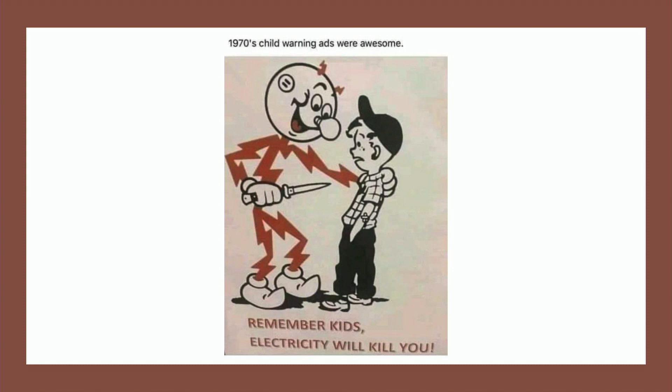Secondly, yeah, I've done that. Secondly, I want to tell you that electricity, you know this, is very dangerous. And this is an advert from a long time ago in America, I think. I put that in there because I wanted to have some visual bits. I thought electricity being invisible, it's a bit difficult to show people what it's like. Now, I've done that.

Electrician's terminology can be quite difficult to understand. So in your notes, there's a page at the back about electrician's terminology. It's very brief, it's just one page, but it gives some of the common words that we use. And before we go any further, I want to remind you what a ring main is. And are these in order? What is a ring main? Here we go. This is a ring main.

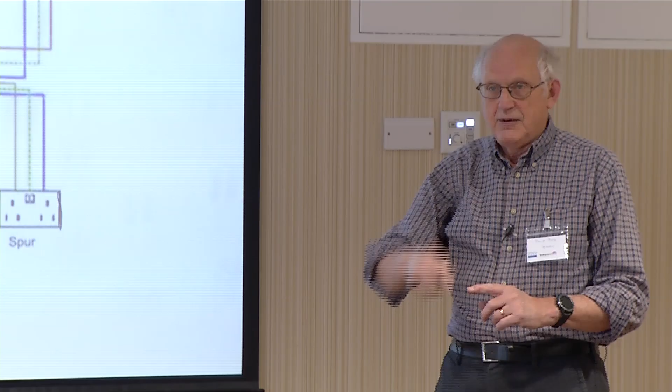It's diagrammatic. I know not all of you will be comfortable with this, but a ring main means we've got cables running to every socket from the distribution board, which is this one at the bottom here, and it goes round to every socket, and then back to the board. So it's a ring with sockets on it. Now, can any of you see any of those circuits that aren't on the ring? In other words, they don't have a cable coming from the left and the right. One of those, yeah, that one? And the other one, yeah.

There are two spurs. Now, this spur is taken off a socket. This spur is taken off a junction box, which might be under the floor, and you'll never find it if you don't know it's there. The disadvantage with rings is that the fuse that we put there to protect the circuit, and fuses always protect cables, the fuse is designed for that ring to be unbroken.

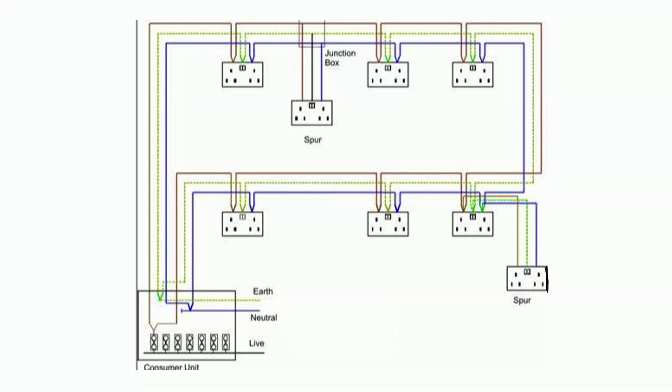Now, that spur is okay, but people often add sockets in their homes, don't they? So one problem is people adding another spur to that. That piece of cable then could get overloaded, and the cable could get red hot and start a fire before the fuse there goes. I'm not going to talk very much about rings, but you may be interested to know England is virtually the only country in the world that has them. Other countries thought, not a good idea.

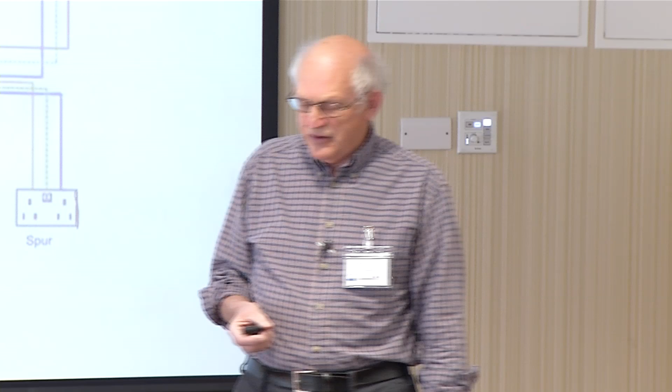Now, I'm going to move on to... well, wait a minute, before we do that, this is a very simple diagram of what you might find in a house. You can see at the top, fuse box, consumer unit, distribution board, DB. They're all words for the same thing. I'm either going to use fuse box or DB. DB is what us electricians use for short.

Now, there's a ring. All other circuits serving sockets apart from rings are called radials, and this is a radial. I always think of it like a tree. It's upside down, in fact. Cooker on its own circuit takes a lot of juice, so we want to keep it separate.

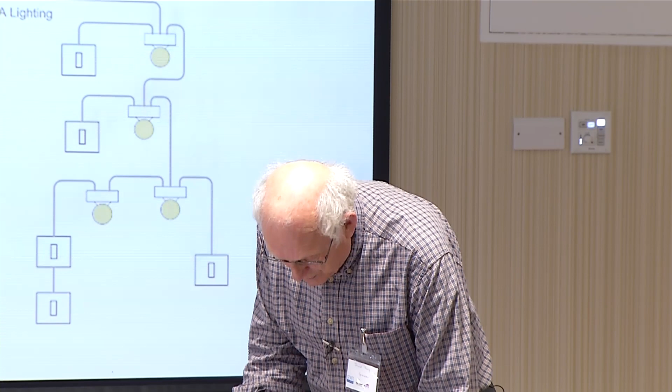Lighting circuit, one thing of interest here, you've got a light with a switch, light with a switch, light with a switch, light with two switches. That might be on a staircase where you've got a light and you want to be able to switch it on or off from the top or bottom of the stairs. Two-way switching. Now, if you want to know more about ring mains, it's in your notes.

Why do we have circuits? On this board here, we have one circuit for the ring, one for the radial, one for the cooker, one for the lighting. So we've got 4 circuits in this particular configuration. Why do we have circuits? Anybody have a guess at that?

Okay, I'm going to answer the question as if I'd been asked. We have circuits. We could, theoretically, if everything was fine, just have one fuse there to protect everything, right? And that fuse there would be to actually protect the electricity supplier's cables in the streets. In case something went wrong in your house, we'd want to protect the cable under the ground because it's expensive to dig it up. We could have one fuse.

The reason we divide an installation into a number of circuits is, one, for convenience, and two, nothing is perfect. Things go wrong. So if something goes wrong in a circuit, it at least has only gone wrong in that one circuit. Let's say your lights conk out, and you've got a trip switch, if you're lucky, got a modern board, trip switch switches out, you put it up and it goes down again. It's unhappy. It's tripping in order to stop cables overheating.

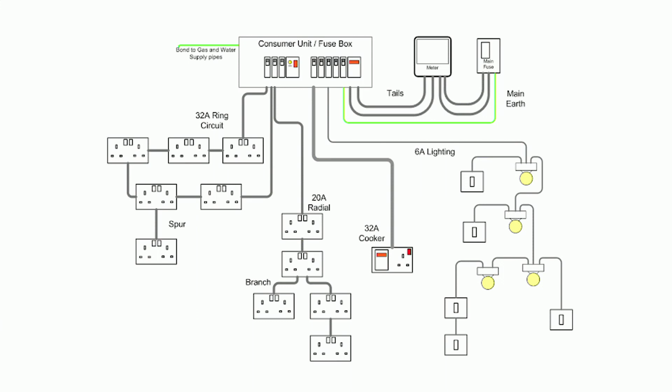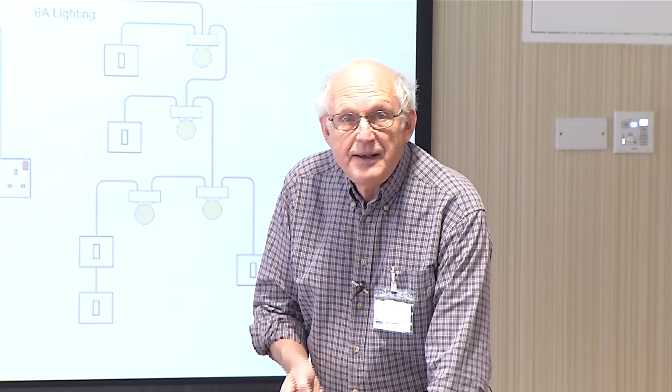At least only your lights have gone off, and you can say, well, we haven't got any lights until we get an electrician round, but let's use that standard lamp in the basement for lighting up the bathroom because there's no window in there. You know, that's convenient to be able to do that. Now, you'd also need bigger cables if you were going to put them all on one cable. You need a much bigger cable if you put them all on one cable. You would, that's true. Good point.

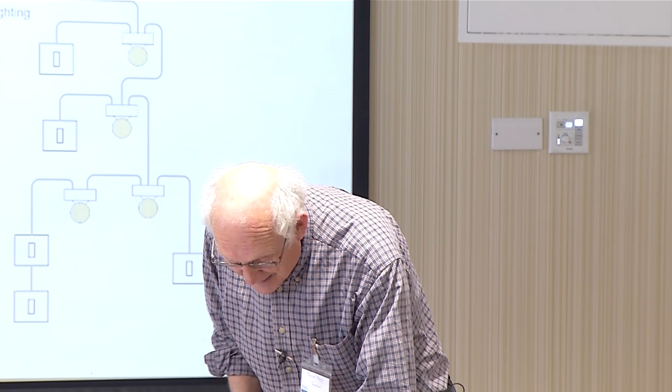Now, I'm going to move on. Have we got to this stage yet? Yes. Pitfalls following doing it yourself. Now, I'm not assuming that any of you would work on your own electrics, although there's nothing wrong with it. Certainly if you're changing a light fitting for another light fitting, or changing like for like, as we say, no regulations apply to that. Anybody can do that. You can do any electrics you like.

In fact, 2 people over the last 10 years, 2 men who were bringing up their house to a better standard, were rewiring the house. I've done a number of rewires, big job. Each time I negotiated with the man doing his rewire, and we did it together. Basically, he did nearly all the grunt work, and I was there to tell him what to do, and there at the end to check he'd done it to the standard that I would do it or better, and to sign it off, to make various tests and check it was all okay.

And I remember the second man, because I went in for an hour every couple of days to see how he's getting on. And I went in there and I said, you'll have to take all those cables out again. You haven't done what I told you. Those cables are too near the edge of the joist. He listened very carefully from then on. So the thing is, he was doing that job under my very careful instruction.

Most electricians wouldn't dream of doing something like this because it requires very good communication both ways. And many electricians, and it applies to some extent to other tradesmen as well, in this country, are not as good communicators as one would hope.

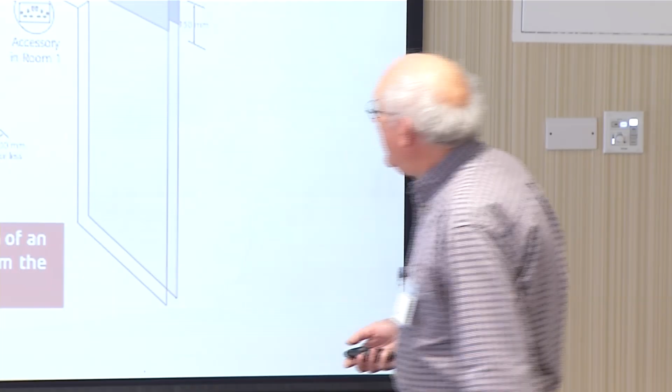Have you ever been in that situation where you're going to hang a picture on the wall and you just wonder before you drill into the wall whether there's any cables in the wall? Well, prior to, I actually looked up the date, prior to 1981, there has been a regulation about where you can put the cables, because remember, most of an electrician's work is invisible. It's cables under the floor, in the walls, up in the ceilings. Now, most of the cables are invisible, so you don't know where the cable is.

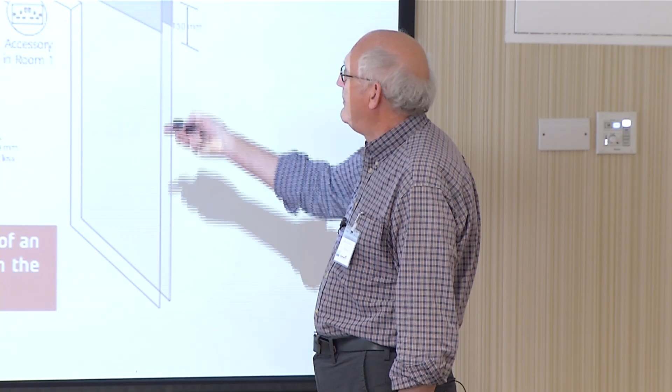So if there's a socket, say here, then the regulation says you must regard these up and down and left and right. You must regard those as what it says in this regulation, prescribed zones. In other words, don't drill there because there may be a cable there. Remember, nothing's perfect, so the cable may not go like that. It may go, the electrician was a bit, it sort of goes like that.

However, the general principle is steer clear of above and below and to the sides. And also, there are two other zones in the corner, whether internal or external, 150 mil. You can put a cable that way or this way.

Now, interesting fact, about 6 weeks ago, one of my subcontractors who works for another electrician told me that that's an okay place to run a cable. I said, it's not. He said, it is. And I showed him the picture in the book. And he went back to his boss, who'd been teaching him as a qualified electrician for years, and he had to tell his boss he'd got it wrong. None of us is perfect.

Another one I can show you. This is a regulation that's in our regulations, but it's more to do with the structure of a building than to do with electrical safety. If you're running cables under a floor, it's easy when you run the cable between joists. That's nice. But if you have to go across joists, there's usually not a gap to push a cable through. So you're either going to drill a hole like that in a joist and run your cable across the room that way, or you make a notch in the top of the joist there, and that looks like a pipe to me, but this is a cable.

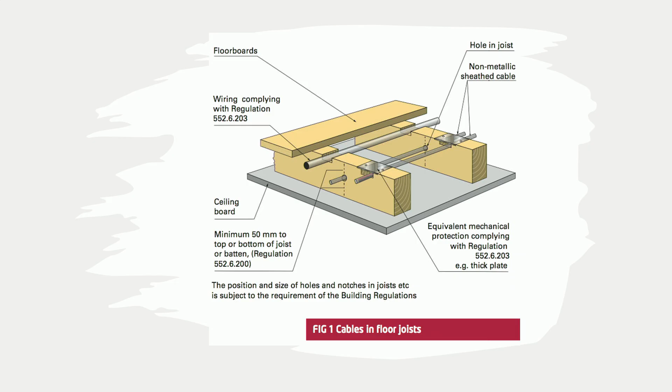And in fact, I think this isn't a very good diagram, because what I do, that cable, once it's come through that slot, I bring it down like that. So that there's minimum chance, because at the moment you could screw a screw into there, even though there's nothing underneath that cable, it could damage it. So that's something that people aren't aware of very much when they do their own electrics.

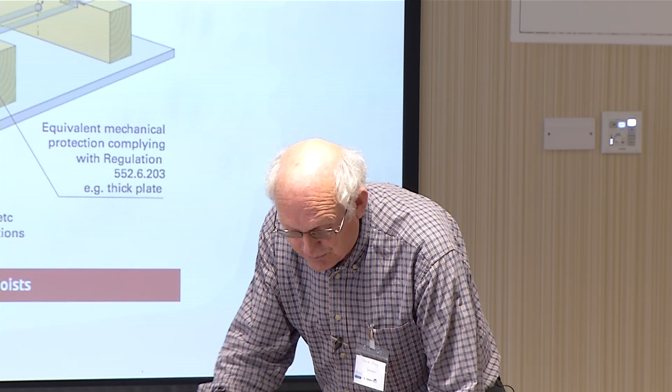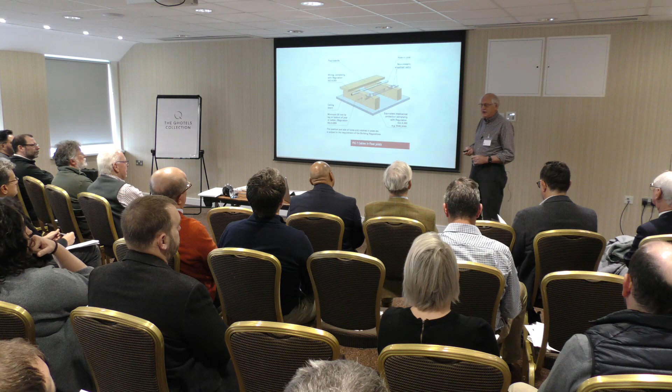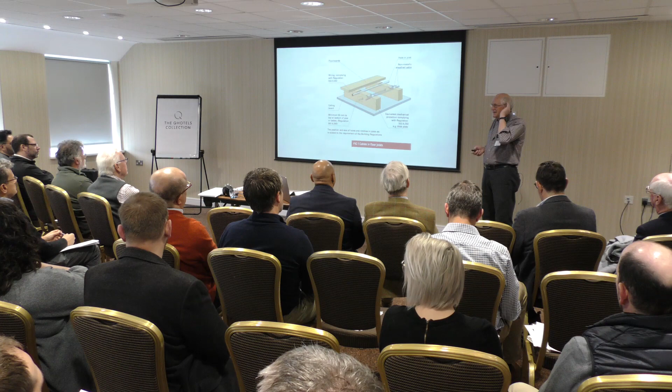Now, connecting the earth wire, does anybody know why we have an earth wire? Because if you travel to other countries, you often don't have an earth wire. They have live and a neutral, no earth wire. What's the earth wire do? Isn't it supposed to conduct away some of the voltage to the earth? So instead of getting a full electric shock, most of it is carried away. That's a very good answer. Yes, thank you for that. I'm going to move on to the next slide.

Now, in fact, if that happened inside there, if the live and earth were touching, if it was a trip switch, you wouldn't be able to push it up. You push it up and it comes down again. It won't stay. If it's an old fuse, like in this plug here, it would blow and it would break the circuit so it wouldn't go anymore. So that's one reason we put an earth in.

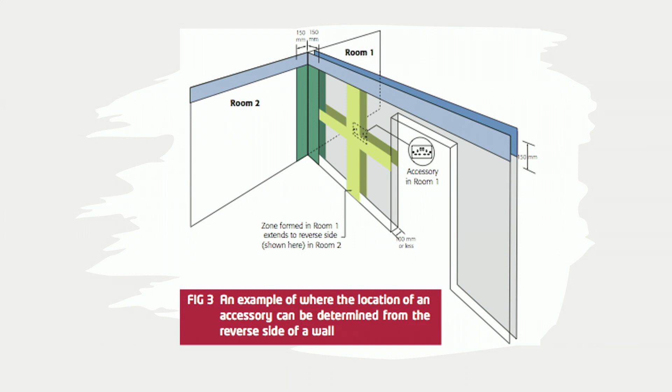So yes. Sorry, can I just ask you, on the previous slide you said that a cable wouldn't be okay running along the bottom, on the previous one where it was zoned. Zones, yeah. But why is that? Let's suppose you put a socket here, and you need to get a cable. The cable's coming under the floor, and you've done it diagonally across there. You would think that this might be an okay place to drill into the wall because you want to put a low-down shelf. Oh, okay, so you weren't talking about horizontally across the floor? Yes, horizontally. It's the cables from a socket or light switch or anything electrical.

Here we've got an example here. The cable, whoops. Does anybody know how to sort this one out? Yes, calling the electrician. I shall continue. There we go.

This is an example of an electrical accessory, and the cable to there should either run vertically down from the ceiling or up from the floor. Thank you, sir. Brilliant. Lovely when people know what they're doing. Or the cable could run sideways. What shouldn't happen, and we rarely find, but it does, is a cable running diagonally, because there's nothing to say that there's a cable running there.

So that's the regulation. The reality is that we go into houses, and particularly if they're 60, 70 years old wiring, we find all sorts of things. But this is what you should find. It's designed to keep us all safer. Another reason for an earth wire: imagine you've moved into a new house, and you don't like the white plastic switches, so you get some nice Georgian ones that match the other things in the house, and you change all the switches for these Georgian plates. And they're of course made out of metal.

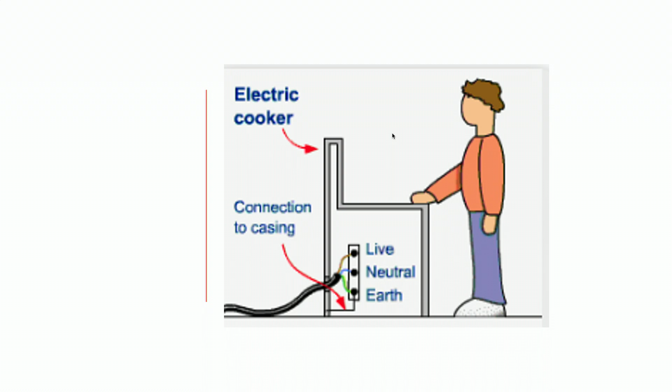And imagine, inside your light switch, if the live wire touches the metal of the switch, then that switch will be at 240 volts. If, however, the switch plate is earthed, as it should be, then it will cause a fuse to trip, and it will save your life. You imagine you're switching a switch on, bang.

Don't touch that. Sorry? Don't touch this. Don't, thank you. I always listen to good advice. Thank you very much.

Now, a couple more things about jobs people do for themselves. Changing a shower. Now, changing an electric shower, you might say, well, I've got the same model, the pipework will fit, I can wire up the electrics, that's all right. What you didn't think of was that your old shower was a 7.5 kilowatt, on a 6 mil cable, protected at the fuse box by, let's say, a 32 amp fuse.

And you've gone and bought a 10.5 kilowatt shower because it said on the box, gets nice and hot. Well, it said it another way, but that's what you wanted. You want a good hot shower. What you don't realise is that you're running that shower for 10 minutes and the cable is getting hot. Now, that's all right because the 32 amp fuse should protect that cable. But remember, we never rely on things because nothing's perfect.

If that 32 amp fuse chose to be 1 in 1,000 that didn't work, that cable's getting red hot and starting a fire. And the cause of that was you, I'm sorry to say, the person changing their shower for a higher power one without thinking about what they were doing and perhaps getting advice.

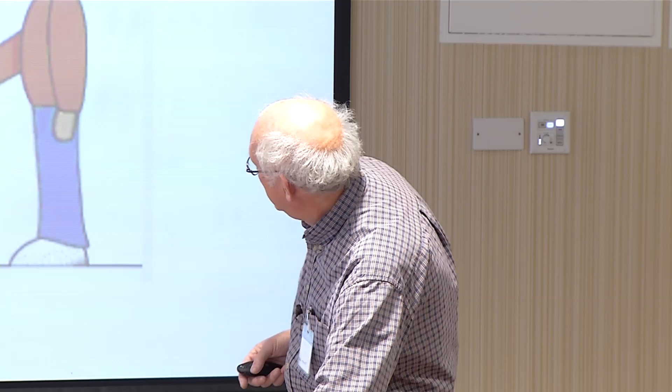Another thing we were talking about, we'll go back a few slides, we were talking about, doesn't work anymore. Don't understand why not.

We were talking about running cables under the floor. You imagine you've got this hefty cable for a shower run under the floor, it's notched through joists, and one of the joists where it's notched is under a floorboard, and you walk on it going up the stairs, and over years you keep squashing that cable. And that then becomes a weak point in that cable. So if anywhere along that cable is going to go, it's that place that got damaged because you allowed a cable to go through a place where it gets squashed over and over again, eventually damaged.

Okay, so let's go back to there. We'll jump now to something that happened about 2 months ago. I was in this woman's house in Totnes, and she had a problem with a particular circuit causing her RCD to trip, and I had to find out what was causing that, and there were about 6 sockets on that circuit, and she said, I think it's that one. I always take notice when people have a thought like that.

So I opened up this socket, and I said to her as I took it off the wall, there's some odd stuff on here, look at this. And it was like there was a sort of deposit on top of the metal contacts where you put the wires in. And I pulled it out further. Oh, there's a slug in here. And oh, the slug's still alive.

Now, what had happened is somebody had drilled a hole from this socket outside. And when we go through a wall in a building, we always go down from in to out to make sure water is less likely to come in. So they've run a cable out from that socket to have a spur on the outside for an outside socket. All very good. They didn't seal the hole.

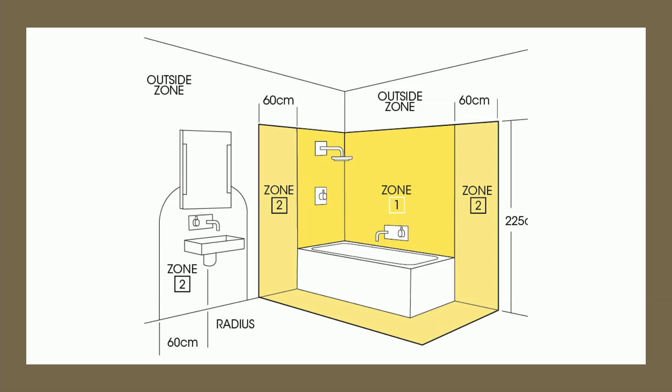Please. On the previous slide, when you've got a wet room rather than a bathroom or a shower room, so there's no shower cubicle, how do you go about measuring the zones for a wet room? I believe, I'd have to look it up, but I believe the whole of a wet room would be zone 2, if not zone 1. I'd have to look it up.

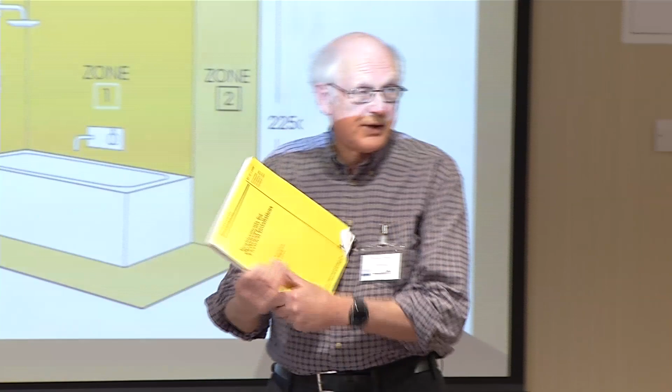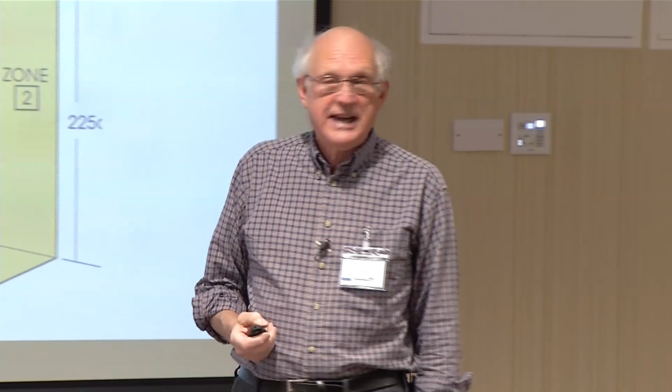And in fact, this is the book, it's referred to in the notes, this is the book that we electricians use, Requirements for Electrical Installations, or BS 7671 for short. You might like to take a minute or two to come up here afterwards and have a look at it. It's the least readable book I have ever come across. I never bother to look anything up in here. I belong to NAPIT, and I ring up the engineer, and he knows the book inside out, and I'll ask him anything. I would ask him that question about the wet room, and he'd tell me it's all zone 1, and then I'd know. I said, good, I guessed that.

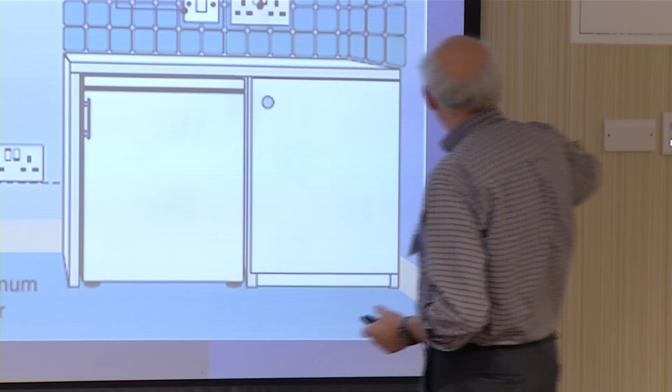Now, we were going on to, oh, that's right, disabled. So, because of our increasing awareness, only recently really, about disabled people struggling with all sorts of things, minimum height above the floor for sockets is 450 mil, and the maximum height of light switches, this tells me the age that this was done. That's the height of light switches in the old ways, thereabouts. We bring it down to about here, 1200 from the finished floor level for switches. And basically you can put switches and sockets anything between those two heights.

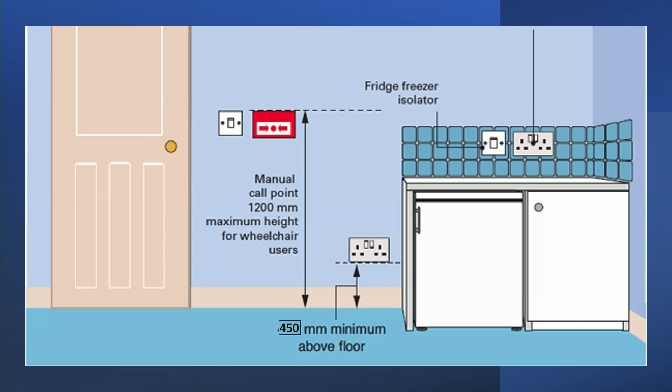Not only disabled people, I've got some very elderly clients who say, oh, I really like that new socket, I can reach it. Because when you get very old, getting down to the skirting board to plug something in is very hard. So it's an obvious thing. So these are the new heights, and we're talking in this chapter, as I call it, about older properties. So older properties won't have the new heights necessarily.

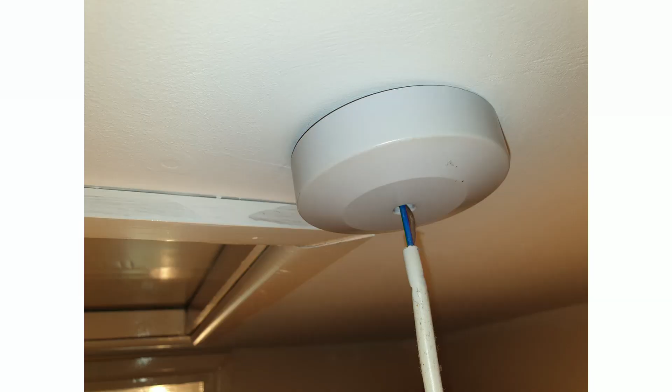Let's see what else we've got here. This is an example. All cables have to be covered with 2 layers of insulation. You may notice here, this is a pendant. Don't have any in this room because it's all modern lights, but you know a pendant's got a rose on the ceiling, a cord, a lamp holder, and a lampshade maybe. And I still go to houses that are looking like this.

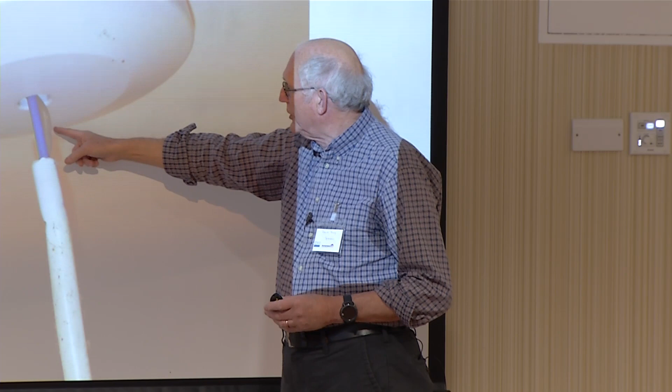And here is an example. This cable, the flex, has a yellow and green in it as well, but it's got a brown and a blue in it for live and neutral. And that is insulated. Each of those copper conductors is insulated, and that's outer insulation. So there's 2 layers of insulation.

There should always be 2 layers of insulation between the live parts and you. And this is an example that on an EICR, it wouldn't fail, it wouldn't be unsatisfactory, but it would be a code 3, could be improved. It looks unsightly as well.

It's actually quite a simple job to unscrew that, to pull that cable up a bit into the ceiling so you don't see those. But it's an example of something that is not well done. So I would think whoever did this either didn't know, didn't care, or was in a rush and they didn't do it properly. Older properties, and most properties in this country are old ones.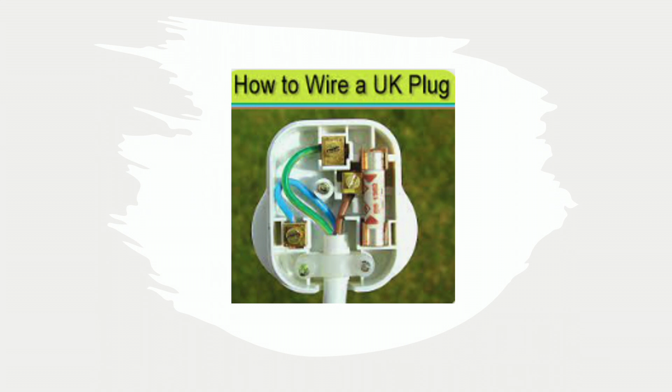Now, going back to talking about plugs, that is a well-wired plug. And you can see the insulation, the primary insulation, goes right up to the terminal in each case. Can't see any copper there. The next slide, what is the next slide? Oh! Can anybody see why this is not wired so well?

Something there, yes. Piece of wire wrapped around the terminals, possibly, yes. Anything else? No earth. No fuse. No earth, no fuse. Some of that secondary insulation is showing there. The cord grip there isn't gripped on that bit, there's a lot of things wrong with it. I thought I'd show you that. I just came across it on the internet.

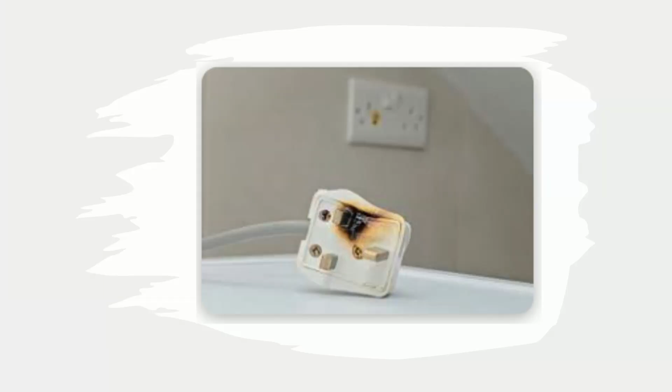This is something you may have seen before, which is a plug that is obviously unhappy. Now, it's unhappy, and it's also left a mark, because it was plugged in there. So I can only guess, because I just got this from the internet, but that burning mark is probably due to the fact that years ago, somebody who put this plug on didn't do one of the terminals up tight enough. And in fact, that terminal is the neutral. No, it's the live terminal.

Because they didn't do the screw up tight enough, because it needs a screwdriver and a bit of action with your wrist, the thin copper fibres of the flex inside that connection weren't properly making contact with the copper or brass terminal block. So there was a gap, and that means sparking. So that was probably fizzing for years.

And sparking makes heat and light and eventually is going to burn something out. It's not what you want, but probably due to carelessness. It could be due, let's say 1 in 100,000 times, to a badly manufactured plug. And the quality of all electrical goods has dropped in the last 20 years just because everybody in the world says make it cheap. Back to a distribution board.

I want to tell you something about the distribution board so you have more familiarity with it. I have had this several times where I'm rung up by an old lady and she's got a distribution board. She may not even know about this, but she says her sockets have stopped working. And I said, have you been to the distribution board and seen if one of your trip switches has gone? And she says, my husband used to do all that. Now that is sad because it's why girls should learn just as much as boys about doing stuff.

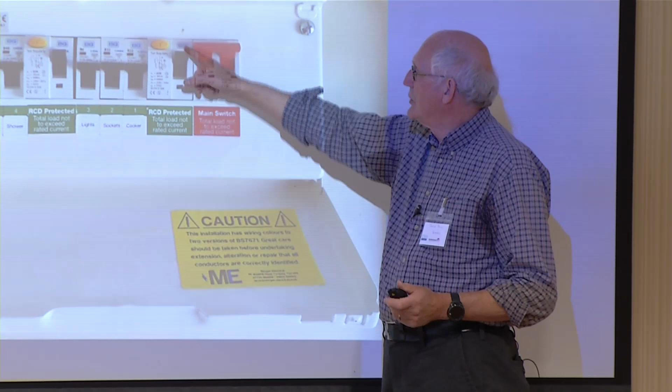So the theory is that if something went wrong, and we call it an earth fault, in one of your circuits, and this RCD looks after those 3 circuits, and there was more than 30 milliamps going to earth from live, this would trip. And if I tried to switch it back on again, it would trip off. And they've probably saved millions of lives, these RCDs. Whether they have or not, I don't know. I've tried to look up statistics. I've never been able to find any statistics that say RCDs work.

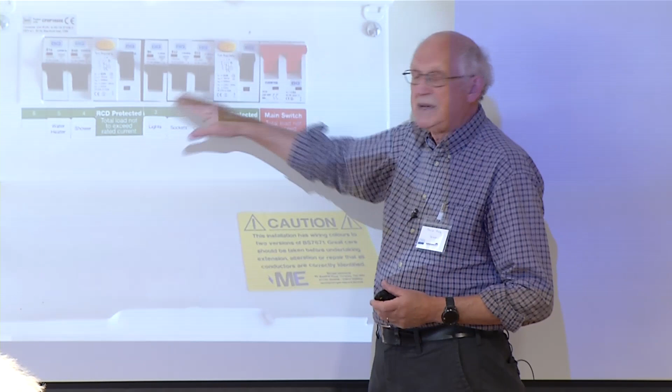Why the 2? This is called a dual RCD board. Main switch, 2 RCDs. And the MCBs, miniature circuit breakers, are divided into 2 groups, the left and the right. And it's because if this RCD trips, let's say this circuit has got a problem on it, this trips and can't be reset, at least you've only lost those. You've still got these. So that's why you've got 2 RCDs.

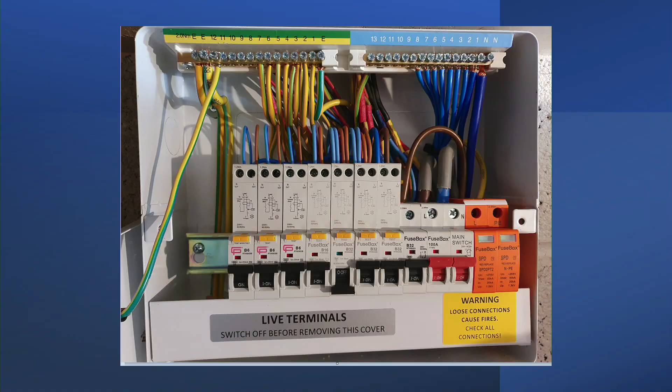However, I don't fit these boards. When I'm asked to fit a board, I only quote for a board... have I got a picture of one here? I probably have. Can you see each of these has got a push button? I'm going to go back for a second. On this RCD, each of them has a test button as well as a trip. The test button is there because once every 3 months or once every 6 months, you should go and test this by pressing that, and this should click down.

Now, they call it a test. It's not really a test. What it really is, is that if that sat there for 5 years, never tripping, and then there was an earth fault and it needed to trip, you know how mechanical things are. They seize up a bit. It might not trip. And I've actually come across this personally.

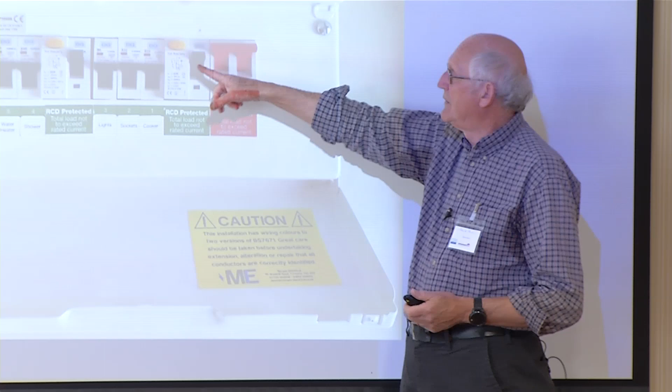In a new build place, there were 2 of these boards, each with 2 RCDs in. And when I first tested them, none of the RCDs were okay. They failed the test. And when I'd done this once, they worked. So what had happened is they'd sat in the same position for so long, maybe there's a deposit on the metal or something, they didn't trip. So it's very important to do this test, this keeping things moving, once every 3 months or 6 months. There should be a label on there saying it.

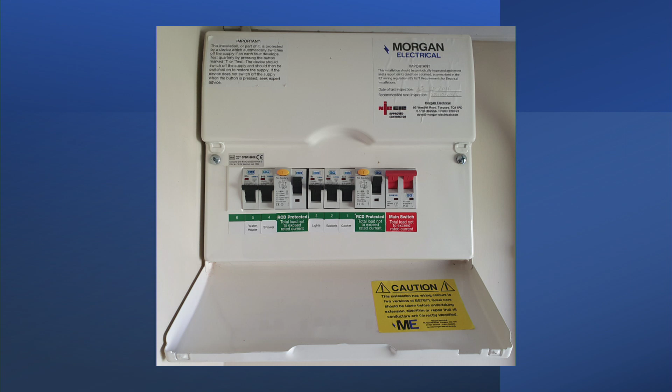There we are, important. That's what that label says. And all over the country, perhaps probably all over the world, people don't do this: one, because they don't know, two, because they don't remember, and three, because they don't care. I really don't know. However, the thing will not work if it hasn't tripped for a long time. It will stay on, conducting electricity when it should trip out to save you.

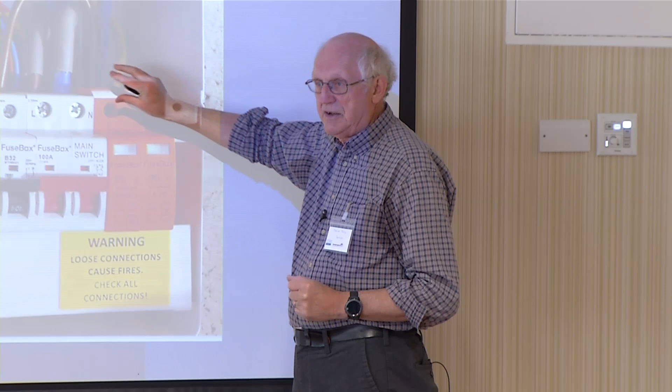The theory is that if there was a fault inside the distribution board, inside here, that caused a fire, by having a metal box, you are slowing or reducing the risk of that problem of fire. I mean, there's not much to burn in there, but supposing there are holes in the top where cables come in, supposing somebody didn't fill them, sawdust got in there, little insects got in there, and there's a lot of stuff that can catch fire. So a lot of assumptions. Having a metal box would contain that heat and slow down or reduce the risk of it catching other things in the house.

We'd be recommending replacing it with a metal box? That's an interesting question, because some electricians would say yes, should be replaced. In fact, the regulations say it only needs to be replaced if it's under a wooden staircase that is also an exit in the case of a fire. Now that's a very obvious place. Some old consumer units are under the stairs. We think nowadays stupid, but if it's plastic, regulation says it should be replaced by metal. Otherwise, if I was doing a report on it, I would say it's unsatisfactory because of the risk.

And another place is if the distribution board or fuse box is in a place that is a fire exit, like it could be in a hall by the front door, and that's the one place that people would escape. And so it should be metal to help protect things.

How much of being metal is to protect the inside from fire if the fire is on the outside? Because of course, if a fire burnt through a plastic box... In your booklets there's a picture of my sister's house that caught fire. I might show you a slide of that. And her plastic box is all horribly melted and blackened inside. Not caused by a fault in the board, but you've got a fire.

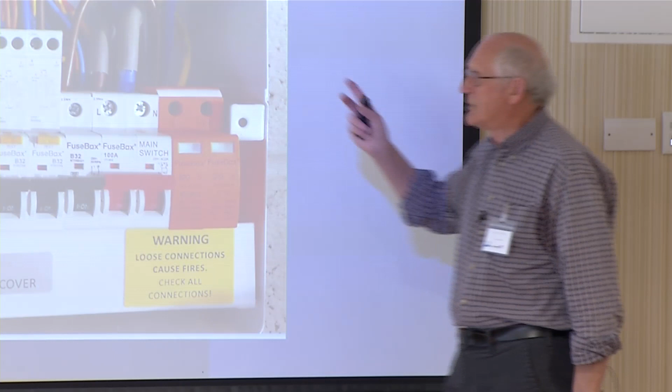If this is a plastic box and a fire heats everything up here, you've got problems with wires touching each other, like live and earth and live and neutral touching, and possibly causing sparking and another fire, and horrendous problems. We don't need it. So a metal box is a good idea. Why they didn't come in years ago, I don't know, because there are some fuse boxes from 30 or 40 years ago that are metal. I know why we produce them in plastic. It's cheaper.

Any other questions? Yes, sir. Just a quick one. If you've got your consumer unit underneath the stairs, which is the means of escape, should you have a smoke detector in there under the stairs as well? It would certainly be something you could argue, under stairs or a means of escape. Choosing where you put a smoke detector is quite a good thing. You have to think in terms of, one, where air flows, and two, what areas you need to detect.

And an attic space is another one similar to that. If you never use the attic, is there any point in putting a smoke detector there? If you use it occasionally for storing stuff, well, maybe it should have a smoke detector. Depends on whoever's making that decision, I think.

See, I normally tell clients this should be a non-combustible box. Yeah. And I tell them, is it over 450 millimetres high? The same regulation as the switch should apply, however, not all electricians would agree. So I don't know. And they shouldn't be in a bathroom as well? Downstairs WC? Unless it's in a cupboard, I think it shouldn't be in a bathroom. I think in a WC, it may be okay. I would actually get advice if somebody was asking me about this.

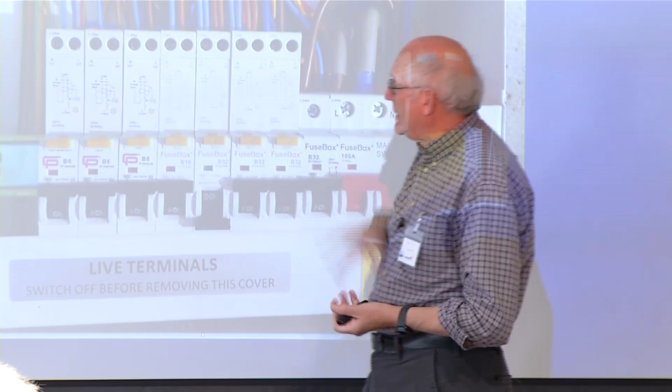Because the thing is, when you do an electrical installation, thinking about one of these boards, if we just put a new circuit in here for the garage, we're obliged, because we've touched this board, to check each of these circuits. But the check is very cursory. Basically, we go to the end of the circuit, check if that's all right, and if that's all right, we say fine. An EICR will check virtually everything on that circuit, check every socket and every light. So there's a big difference in how comprehensive it is. So yes, you should get an EICR recommended.

Sir? Just with regards to the changeover of the regs from an old Wylex to a plastic, back to a metal. So if, for example, you had the replacement of the old Wylex to a plastic about 5 years ago, then there'd be a fixed wire test, and you've got that scenario, it's under the stairs. Wouldn't that come under Cat 3 with regards to refurbishment, or is it under health and safety? You're saying that it needs to be replaced, and it would be like electricians just rubbing their hands. Is that necessary?

I agree, and you ask 10 electricians, you get 10 different answers. To be honest, the regulations that we have apply to now. However, we're often looking at a property that may be 50 years old, and we only need to make decisions about what is unsafe. What is actually unsafe? The fact that you have a plastic board from the past, or one with fuses in it, doesn't make it unsafe because it's still doing its job. Okay, it may have no RCD protection. I might recommend RCD protection is a better thing to have, but it is not considered unsafe according to the regulations. Did that answer your question?

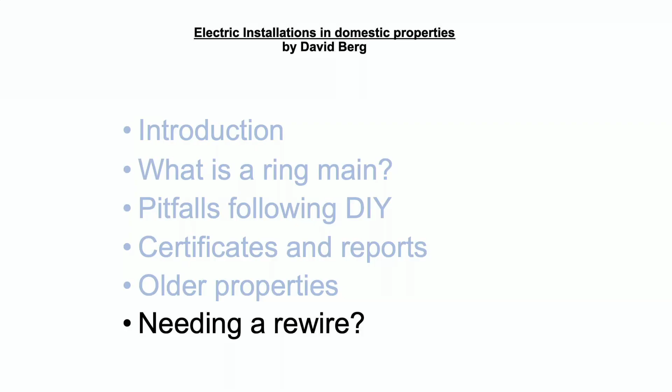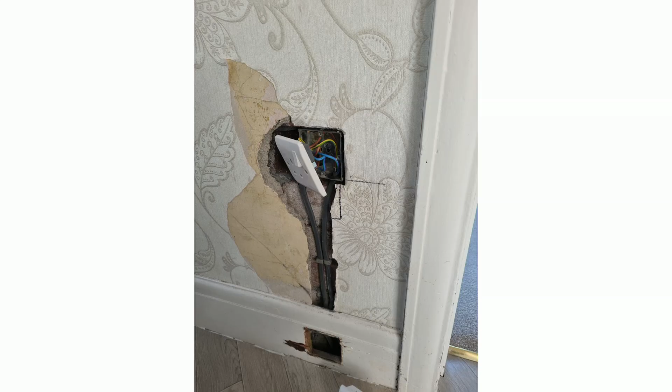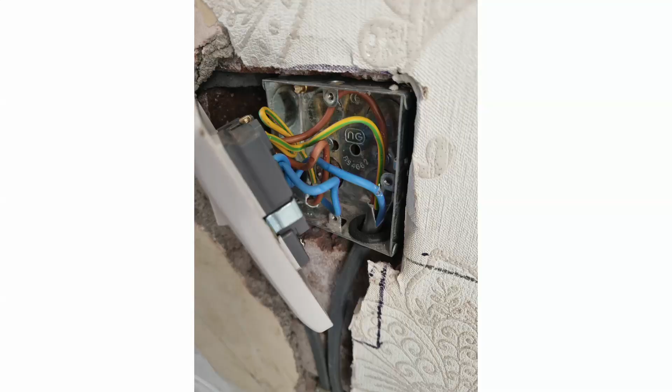This is a rewire that we did less than 2 months ago. We'd just done it, and there was a problem with one of the circuits, one of the socket circuits. And I tracked it down to this socket. The problem is inside this socket, and we need to home in to see what that problem is. So we home in a bit. Can you begin to see the problem? Now can you see the problem?

Right, so carelessness. It wasn't me who did this socket, fortunately, but it could have been. If you look at that point there, the blue plastic inner insulation on the neutral wire has been scraped, and it's bare. There it's not a problem, but when you push the front of that socket in, that wire can touch the metal box. And if you remember, the metal box should be earthed. So the neutral and earth are touching, and the RCD trips. So the RCD on this circuit could not be reset till we found this problem.

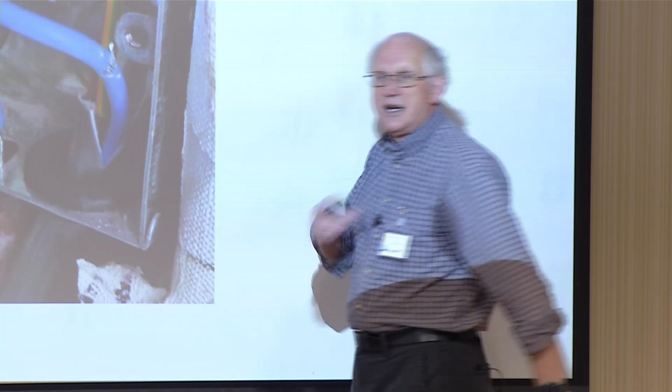As soon as I pulled the socket away from the wall, the RCD stopped tripping. So I said, it's got to be inside here. And so I started looking very carefully inside, because that is almost not visible. As I may have said sometime earlier,

electricians attract particularly people who are slightly autistic, because some autistic people are very good at the detail. They're not so good at communicating. And with this sort of thing, you see something tiny, you have to find that, otherwise none of the ground floor sockets work. It's a serious problem. It might take hours to find that particular socket with a problem like this.

You know, ultimately, if we can't find the problem, we have to say, well, scrap that circuit, we're going to run new cable for all the sockets again. You know, that's not what we want to do.

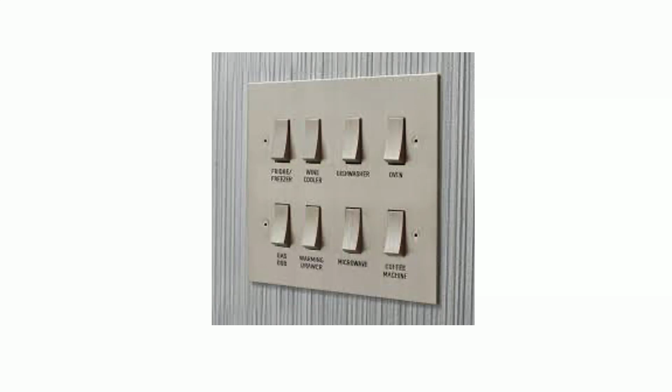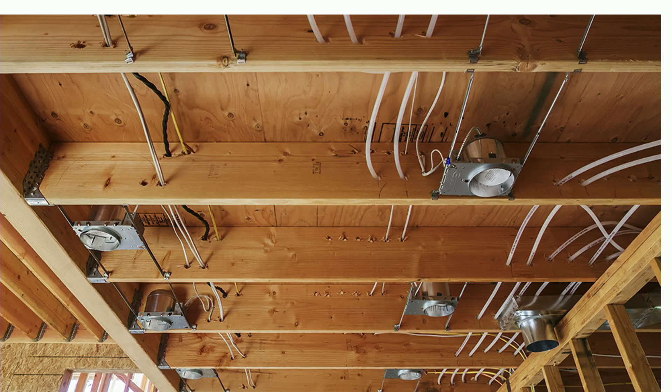What else have we got? This is actually not England, because this is not following English regulations. It must be America. But it's an example. It's a ceiling you're looking at there. And these are light fittings. And the cables are running through holes drilled in.

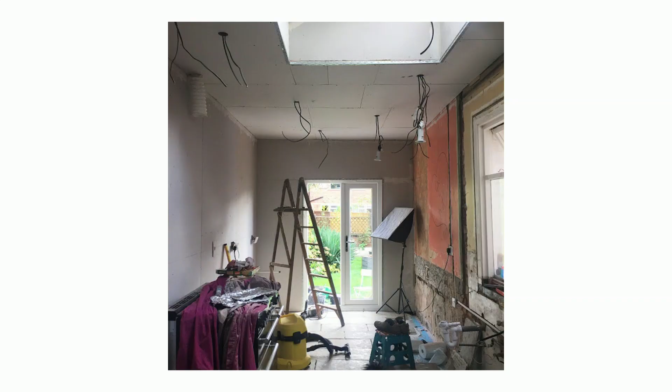Now, why I wanted to show you that is because when you put the ceiling up, you might have, this is now the UK, this is somebody's run cables in the ceiling, and you can see cables drop through for the lights. And you'll notice quite a lot of them have got two cables, because it's the switch live, coming to switch that light on, and then going on to the next one. So that's why you have a lot of complex wiring behind there.

And then particularly, I wanted to show you this. How do I make this go? It's a video. How do I make a video go? First time I've ever used PowerPoint. That's it. It's only brief.

Right. So, changing light fittings. Brilliant idea. Brilliant idea. But watch what happens.

I'll have a go at that. Oh, yeah. Great idea. There we go. Nice and firm. Yeah. Oh, doesn't seem to work, really. Oh, dear.

Well, I thought it was funny anyway.

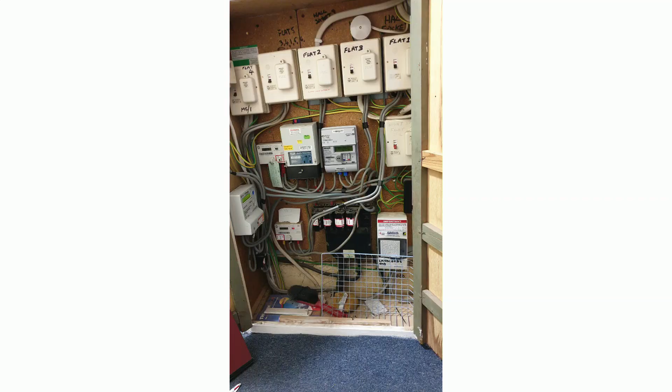This is a block of flats. You can see here, flat 1, 2, 3, and so on. This is your main incomer from whatever the electricity supplier is. And there's 3 phases there, 3 fuses. Those fuses are not owned by the person who owns these flats. They're not owned by the building owner. This and the meters belong to the electricity supplier. So that's all there, and you don't touch them. These fuses are to protect their cables under the ground.

If one of these goes, that's bad news, because you usually have to call them out, and they say, why has this gone? I've broken one of those before. Fortunately, I managed to get a spare, because otherwise the electricity company comes out saying, what have you done here, mate? So these virtually never go.

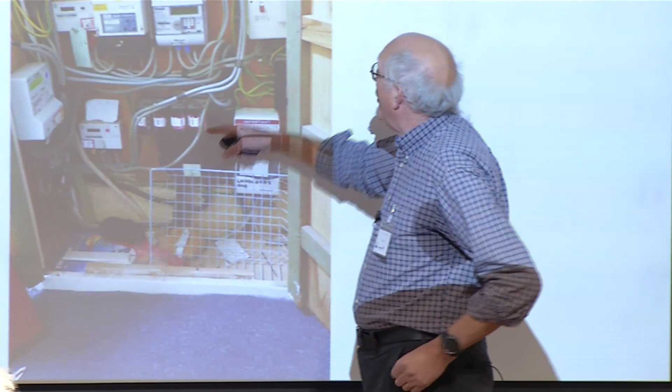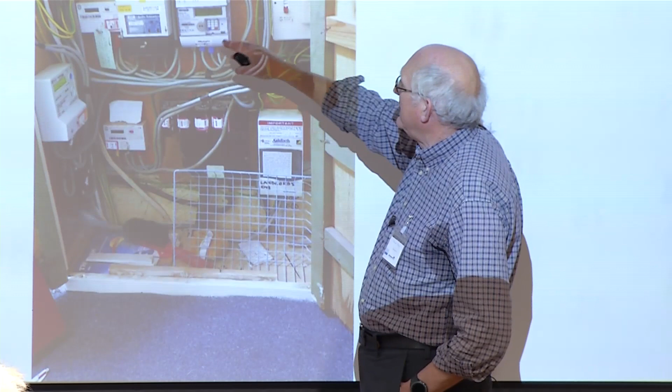And then what we've got up here, because this only protects the live, the neutral is separate. So the live and neutral is run from your incomer through the meter, and then it goes to each of these. Now this, let's say flat 2 here, in there you've got a switch to switch it off, and you've got one fuse, and that fuse is just to protect the cable from there to the flat, which might be many meters away. And if something went wrong along that cable or inside the flat, this would go to protect all of this.

So that's all these are. They're small distribution boards with one fuse in. You've just got one fuse and one on-off switch. That's like a main switch. We don't bother to have RCD protection for these cables because generally they're armoured cables. However, none of those are armoured cables. Armoured cables are very special, they're about as thick as your finger, black, and they've got a steel band round them. So if you tried to go through one with a spade, it would protect it at least to some extent.

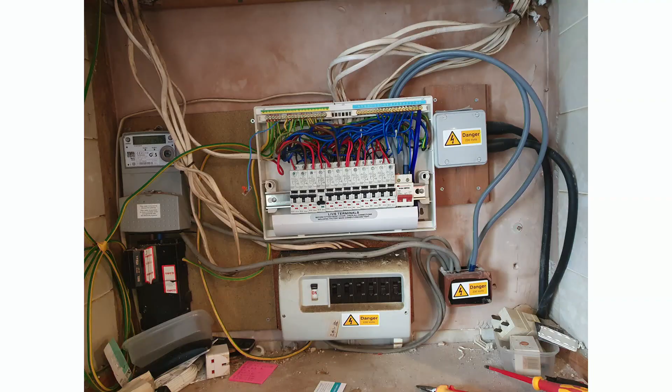And this is just an example of, it looks messy, but it might be perfectly okay. Things are all at an angle. I know the front cover's off, and it's messy because it's inside a cupboard. And I would say whoever's the electrician who's done this, he could have spent 10 minutes tidying it up so it looked neater, because it gives confidence.